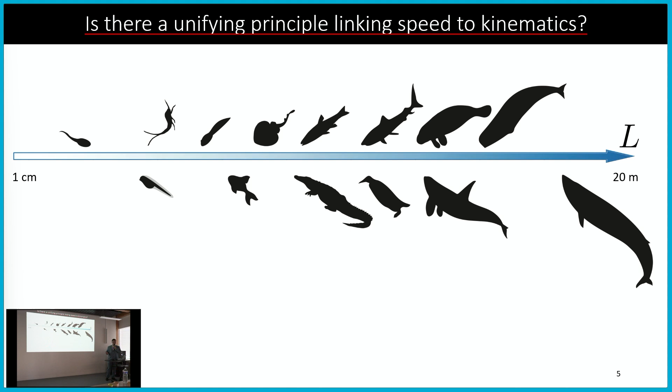So now, first of all, I'm going to introduce the context, pose you the open scientific questions and tell you the motivations of my PhD. And then I will move on with the rest of the work. So the scientific question that has been triggering researchers for many decades is principles that could unify the link between the swimming speed of aquatic animals and their kinematic parameters. For this, researchers in 2014 have taken many species of aquatic animals of several lengths, starting with several centimeters and ending with several tens of meters, and they wanted to find the link between this swimming speed, velocity, and the length of the aquatic animal, the amplitude of fin undulation, and the frequency of fin undulation.

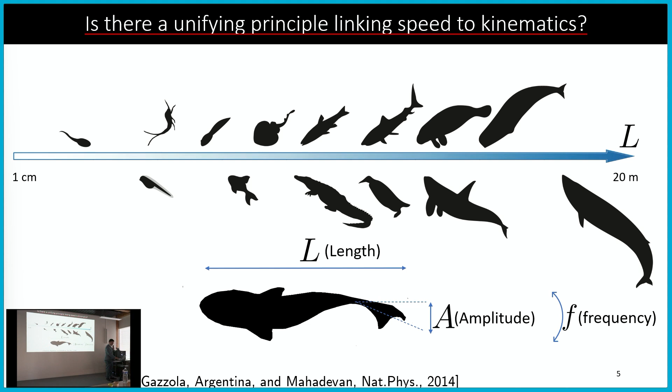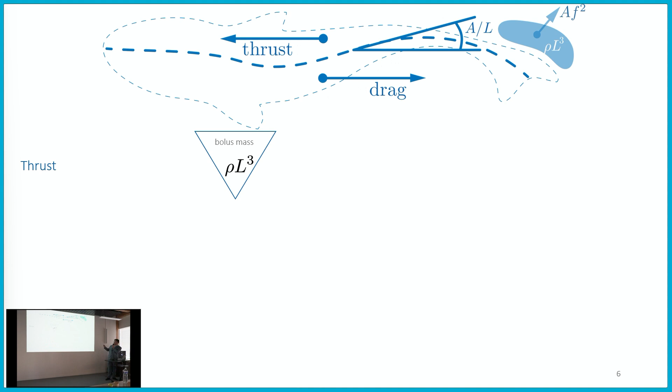So now I'm going to demonstrate you a simple derivation of the force balance when fish is moving in water. When fish is moving in water, it propels with its tail the bolus of water with a mass proportional to the density of fluid and to the length to the third power. And this mass moves with acceleration that is proportional to the amplitude of fin undulation and frequency to the second power. And this force exerted by the fin on the bolus we need to project on the axis of movement of the fish, which is for small angle defined by amplitude divided by length. So the resulting thrust force is proportional to this quantity here.

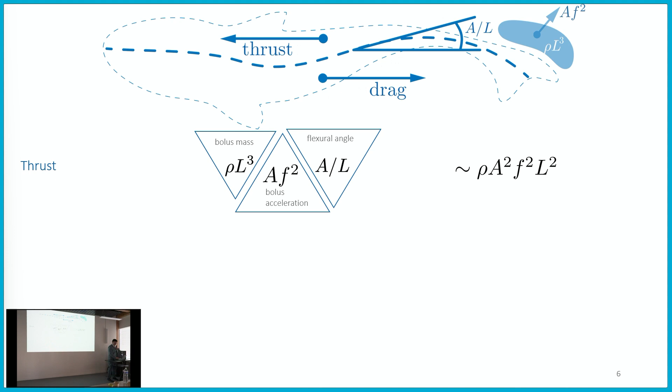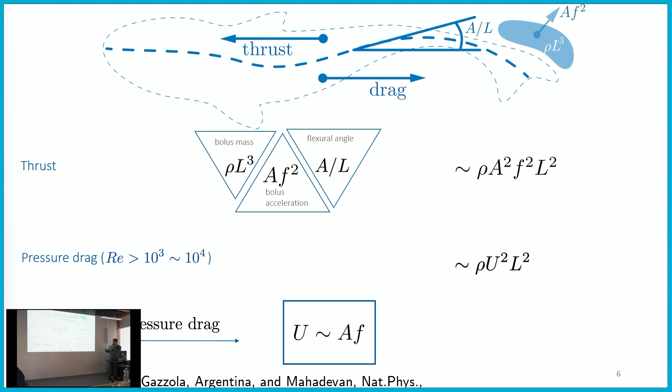On the other hand, when fish is moving in water, it experiences a drag, and particularly a pressure drag for high Reynolds numbers, which is the case of the majority of the fish, and this drag is proportional to the density of fluid, to the speed to the second power and to the length to the second power. So when fish is in constant movement, the thrust force is equilibrated by the drag force. And we obtain that the speed of movement of aquatic animal is proportional to the amplitude of fin undulation and frequency of fin undulation, while the Strouhal number is constant for most of the fish and equal to 0.3.

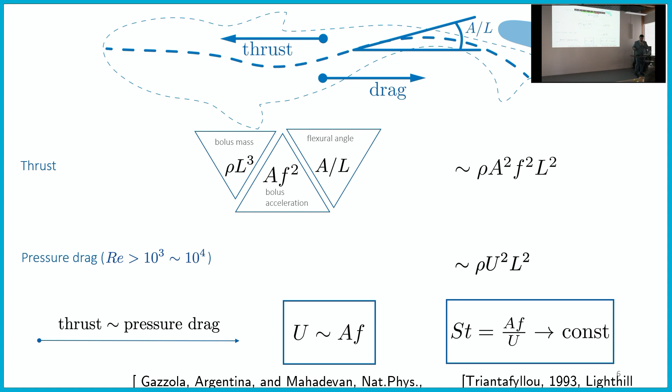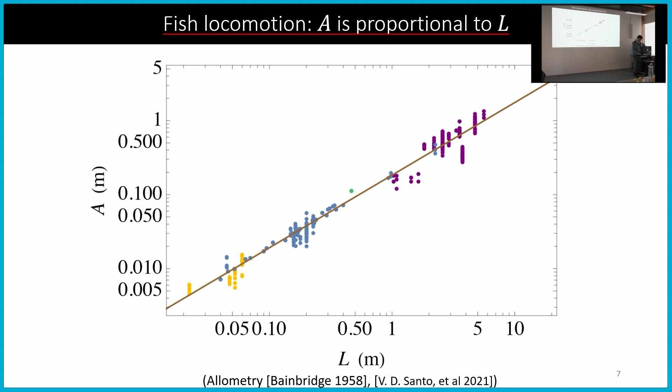On the frequency side, the question of how fish choose their undulation frequency is not that clear, because the frequency can change along the swimming gait, and fish can choose different swimming gaits depending on different circumstances potentially.

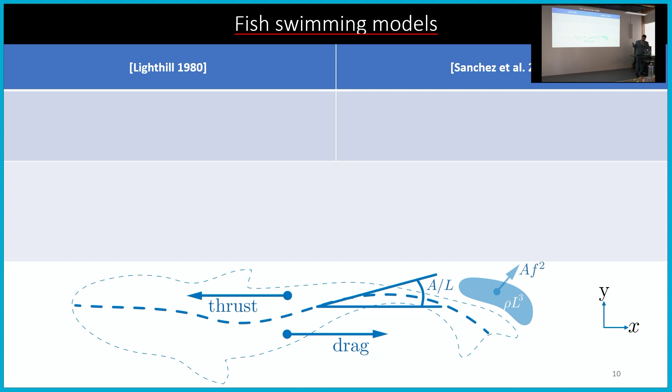There have been many models developed for determining the mean thrust force for fish. We'll focus on two of them, and one is from a researcher of our group. So in 1980, Lighthill studied oscillating airfoils, and he found that the mean thrust force is proportional to the added mass, and this expression is quite similar to what Sanchez found in 2021, that mean thrust force is proportional to the added mass times the second derivative of the angle of undulation.

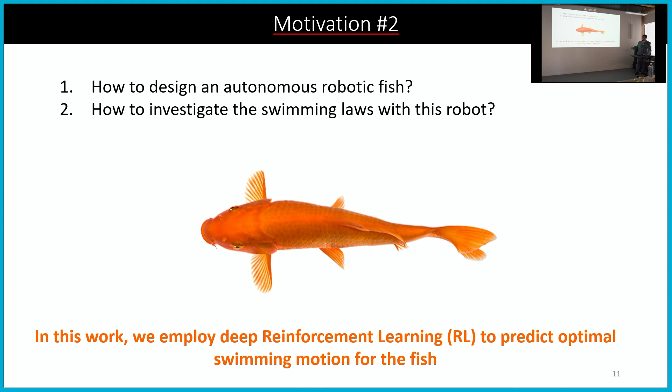Now, another motivation for this work is to construct a mimetic robotic fish and then to study swimming laws with it. In this work, we employ particularly deep reinforcement learning to predict optimal swimming motion for the fish. So before proceeding with reinforcement learning, I would like to introduce briefly machine learning and its subtypes. Machine learning is the study of patterns in data in order to generalize on unseen data.

On the other hand, we have the dimensionality reduction technique. The popular example is principal component analysis. There is also a popular example of the autoencoder network. The network is given an input, an image. It maps this image into latent space, and from latent space it decodes the original image.

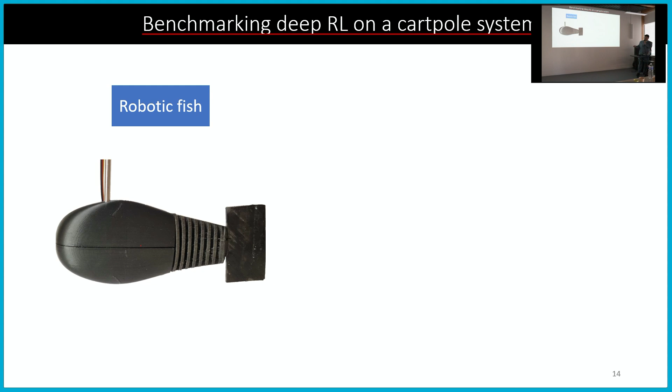So after this agent-environment interaction loop, little by little, the agent learns how to maximize its score. And I would like to emphasize that this paradigm of reinforcement learning doesn't need a physical model to operate. So our focus was the application of reinforcement learning algorithms on robotic fish, but beforehand, I would like to illustrate the application on a cartpole system, which has been a benchmark in control theory for over 50 years.

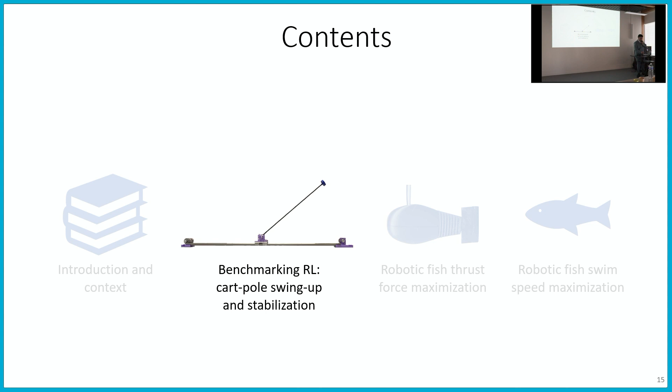So there are two phases of this task, swing up and stabilization, that I'm going to describe in the next slides. So what is the cartpole system? Many of you may already know. It's a pole attached to the middle of the cart. And the objective is to move the cart along the line to swing up the pole and stabilize it at an unstable equilibrium.

There are two variables that change over time in this system: the angular position of the pendulum and the cart position. And we have a control defined by the consigned cart velocity. This dynamical system is governed by two differential equations, one governing theta evolution.

So we have a viscous friction here, we have a gravitational response, we have a component influenced by the cart movement, and on the other hand, we have a component for X evolution. We have consign, we have a viscous friction, we have a dry friction, and an asymmetry component. So the fact that reinforcement learning is able to learn to swing up and stabilize without the knowledge of the dynamical system or these parameters is truly remarkable.

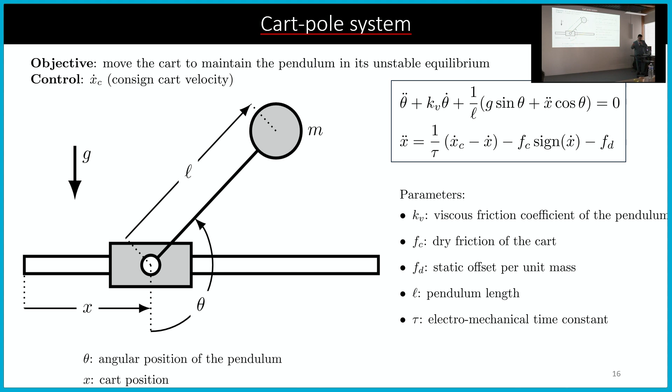Now, I would like to demonstrate briefly the setup. It consists of a Raspberry Pi that sends commands to a DC power drive that actuates the DC motor with pulse width modulation, which moves the cart with a tooth belt. And there are two rotary encoders recording the position of the cart in X and the angular position of the pendulum.

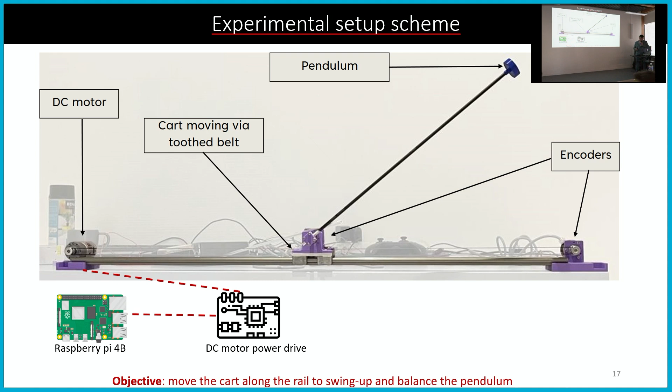To demonstrate the benchmark, we applied model-based control, which consisted of an energy-based swing-up method relying on Lyapunov theory, which only works for swing-up. And then at small angles near the unstable equilibrium, the system can be linearized, and we could apply a linear quadratic regulator to balance the pendulum. The particularity of this approach is that while it works well, it requires knowledge of the physical model and fitting parameters.

On the other hand, we have a reinforcement learning approach to swing up the pendulum. At the beginning, it doesn't know what to do, and after several hours of interaction, the neural network learns how to swing up the pendulum and stabilize it at the unstable equilibrium. Here in this work, we used this algorithm, DQN.

Coming back to the agent-environment interaction loop, we have the following. We have an agent defined by a neural network that outputs discrete actions, in this particular case to stop the cart or to move right or left, the consigned velocity. And we have an environment that changes over time that outputs the state defined by the angular position of the pendulum, the cart position, and their time derivatives.

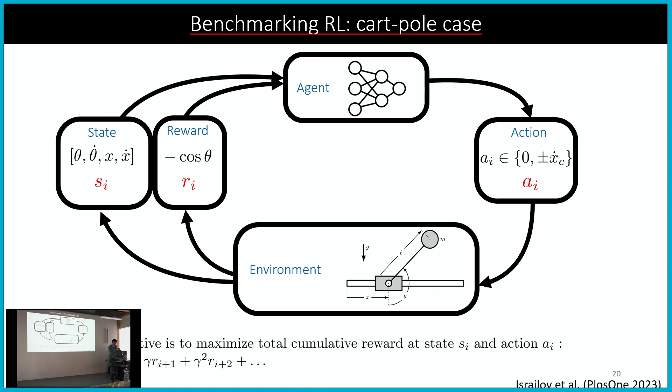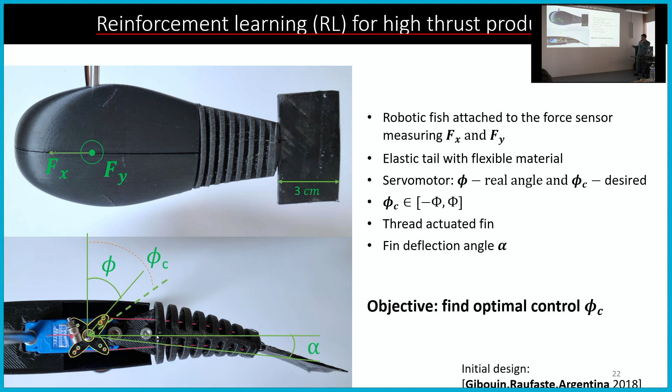This robotic system features a servo motor characterized by a real angle phi and a consigned angular position phi c. The servo motor head is attached to the elastic fin via two threads. And the elastic fin is characterized by a deflection angle defined like this. The objective in this task is to find an optimal control of phi c over time to optimize a certain quantity, particularly here, the mean thrust force.

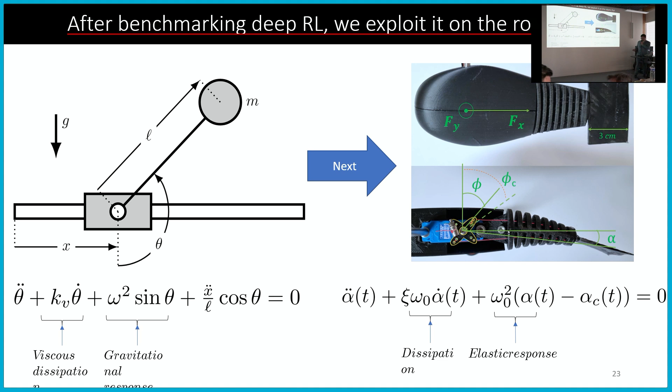Two modalities of learning were employed in this work. We had image-based learning based on the camera mounted at the top of the fin. We take 4 consecutive images because not only do we need to know the details of the undulation of the fin, but also first and second derivatives. This stack of images at every time step is passed to the feature extractor convolutional neural network that outputs the latent space vector, which is passed to the actor-critic algorithm.

I will not go into details, but the actor determines which action should be taken, and the critic network evaluates the action taken by the actor. Another mode of learning is purely low-dimensionality sensor-based. We have a force in Y direction, its derivative, and the consigned angular position of the servo motor.

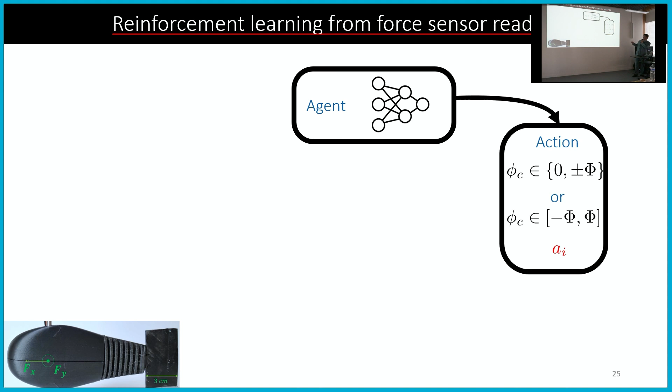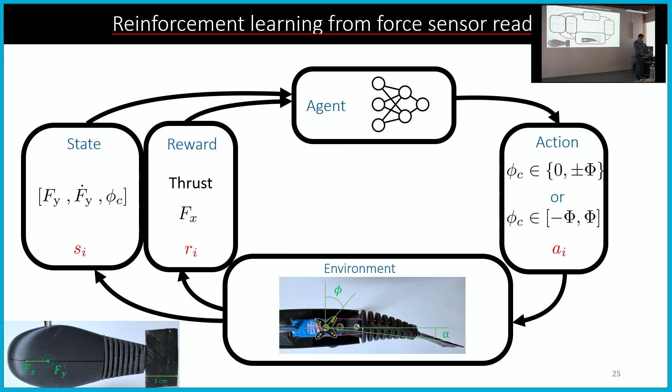Coming back to the agent-environment interaction loop, we have an agent, here a maximum a posteriori policy optimization agent, outputting either discrete or continuous actions and actuating the environment that changes over time, which outputs a low-dimensional state, or in the case of images, the stack of 4 images at every time step. It is passed to the agent.

Now I present you the visual results of reinforcement learning from images. Reinforcement learning from purely low-dimensional sensor state values gives similar results.

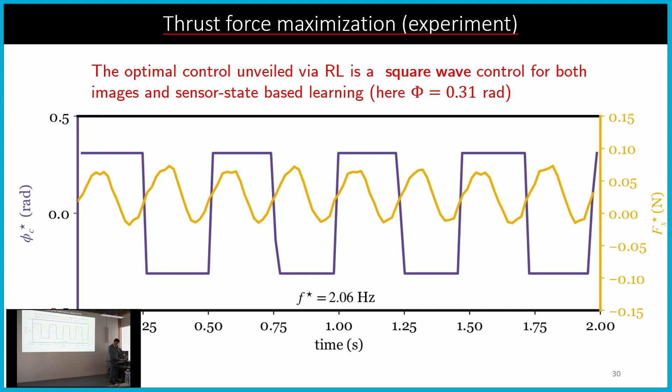Now we suppose that there are 3 potential candidate control policies that could optimize the mean thrust force: square wave, sinusoidal, or triangular wave functions. These 3 control policies were applied on a robotic fish with different frequencies for the same time interval, and we plotted the mean thrust force for all of them.

We can see two remarkable things here. First, the square wave control function outperforms both sinusoidal and triangular wave functions, and an optimal frequency of control exists that can be rationalized due to the elasticity of the fin.

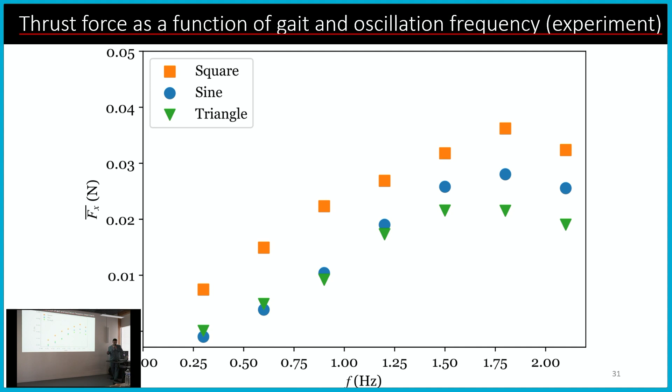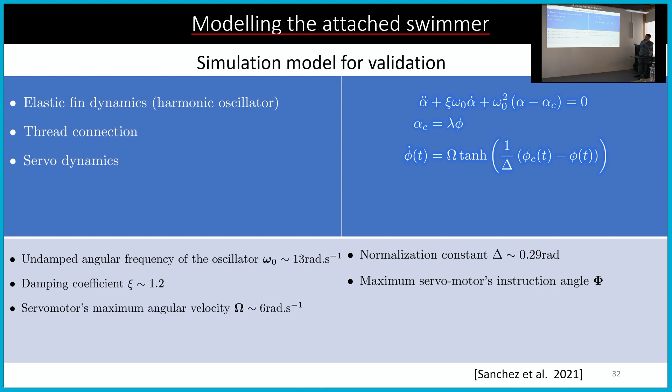Now, to validate the experimental findings we found before, we want to make a simulation that mimics the real robotic fish. An elastic fin is defined by a second-order harmonic oscillator. We have the string connection defined by this linear equation. We have the servo dynamics defined by a hyperbolic tangent function for the speed of the servo motor, and we calculate the mean thrust force as a time integral with this expression.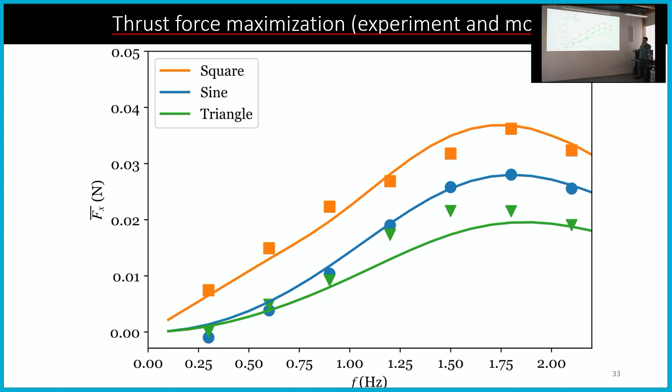When we combine different modalities in experiments and simulation learning with reinforcement learning, plotted here in squares, we observe that they all nicely overlap, and the analytical model as well, only using the dynamical equation without reinforcement learning, we find that they all agree on the same tendency.

This suggests that with increasing instruction angle, we have an increasing mean thrust force, and with the optimal frequency of fin undulation, we also observe the same tendency that it decreases with an increasing instruction angle.

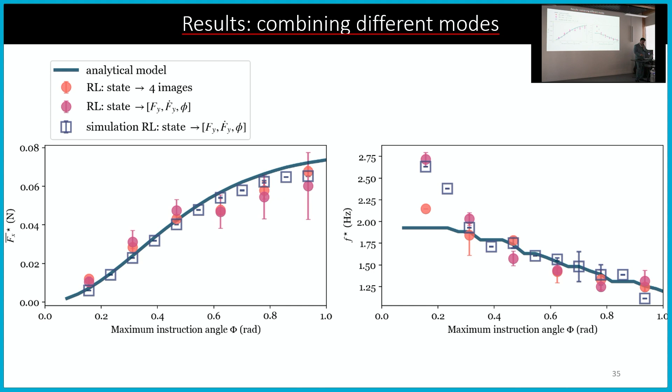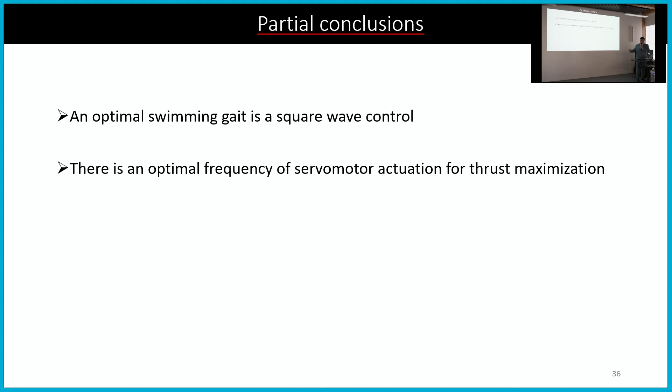So now, to conclude partially, I would like to tell you that we were able to find an optimal swimming gait, which is a square wave control. We found that an optimal frequency of actuation exists that can be rationalized due to elasticity of the fin, and we also found that both image-based and sensor-based modalities for learning give the same results, suggesting the robustness of learning.

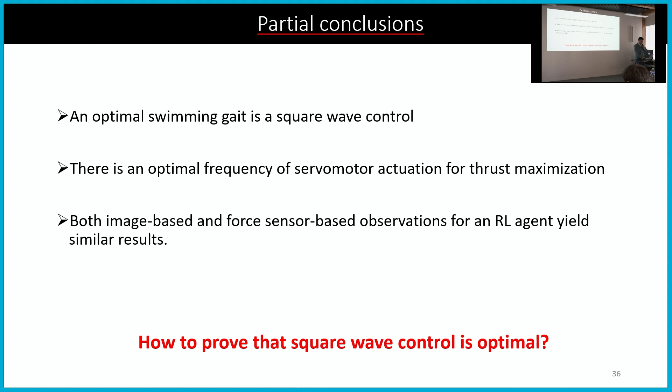And now we want to prove it from a theoretical point of view of optimal control theory, namely Pontryagin's maximum principle, which states that bang-bang control—the common name for a square wave control seen before—is optimal for linear systems. Our objective here is to prove the optimality of bang-bang control for the particular task of thrust maximization under fish dynamics.

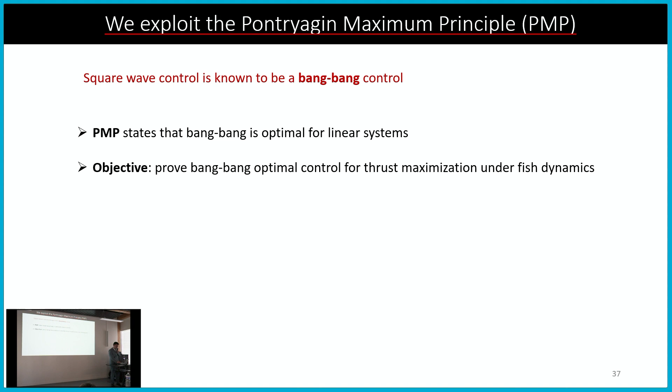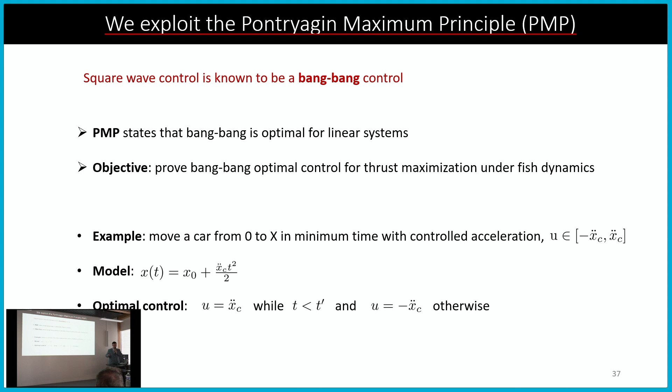Before proceeding with this example, I'd like to give a simple illustration to comprehend the principle. You may be familiar with this kind of example: we have a car parked at 0 that we want to move to position X in minimum time possible, with controlled acceleration bounded by certain quantities. The model of this system is well known, and the optimal control can be deduced intuitively: we need to accelerate at maximum until half of the trajectory, then decelerate for the rest of the trajectory to achieve minimum travel time from 0 to X.

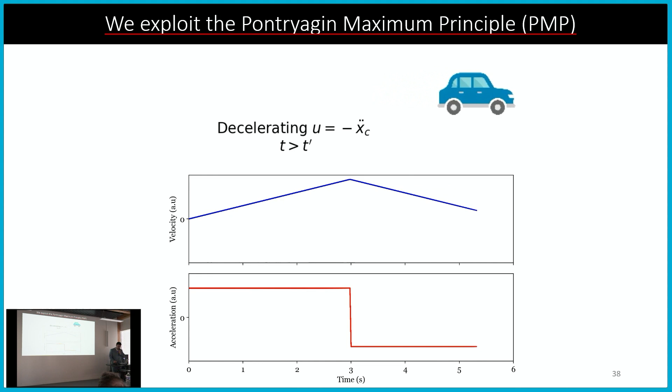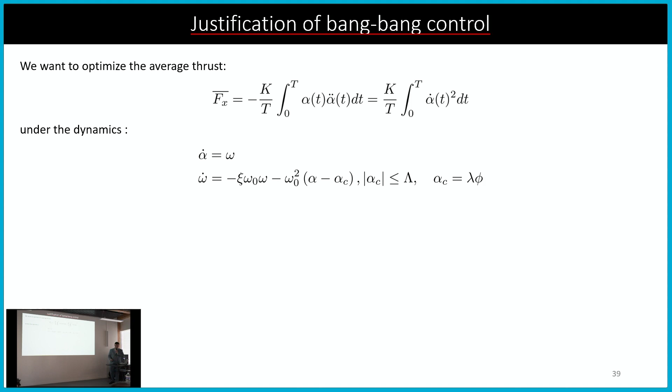So now our objective is to find an optimal average thrust, defined by this equation, under fish dynamics. Here we suppose the servo motor is fast, meaning it perfectly follows the commanded angular position, and we can neglect the servo motor dynamics. So here you see the dynamics only for fin undulation.

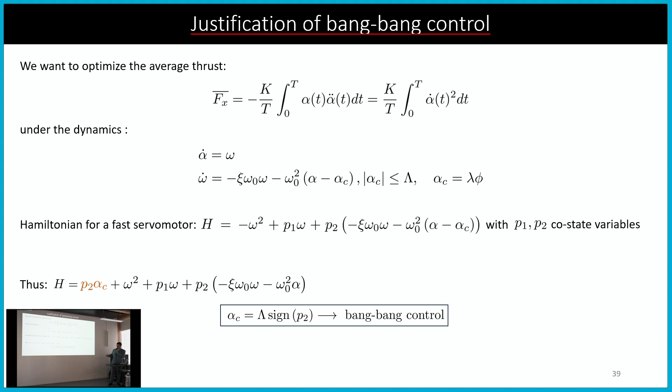The Hamiltonian for this system is described by this equation: this component is for the thrust force, and this component is for fin dynamics with P1 and P2 co-state variables. When we reformulate this equation, we obtain a Hamiltonian expressed like this, and it suggests that we need to choose alpha C in relation with the sign of P2 in order to extremize the Hamiltonian. This suggests that the optimal control is bang-bang control, in order to extremize the Hamiltonian or optimize the thrust force.

Now, moving forward, I'd like to present the task of robotic fish swim speed maximization, free in water. Fish locomotion remains a complex subject because of the intersection of biology and fluid dynamics. Fish have a lateral line system, which is not very well understood, that enables them to perceive the environment.

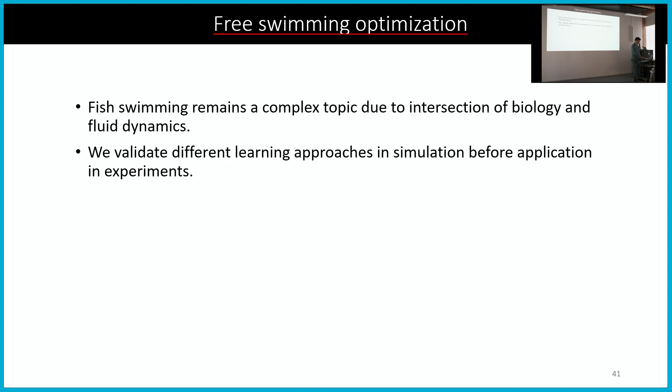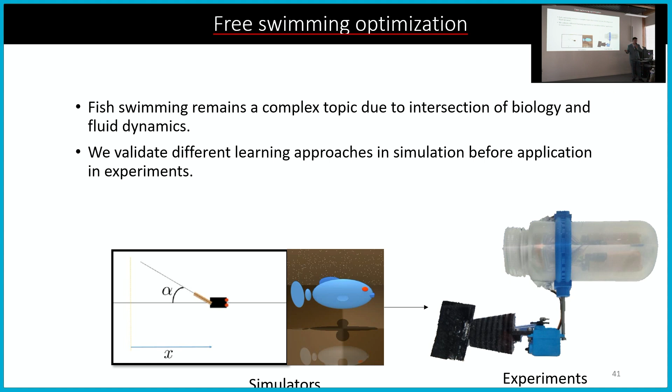The simulation based on custom dynamics is quite idealistic. We also suppose the servo motor is fast and we can neglect servo motor dynamics, but I performed several simulations incorporating it into the system, and it gives similar tendencies. For simplicity and presentational reasons, I don't include it here.

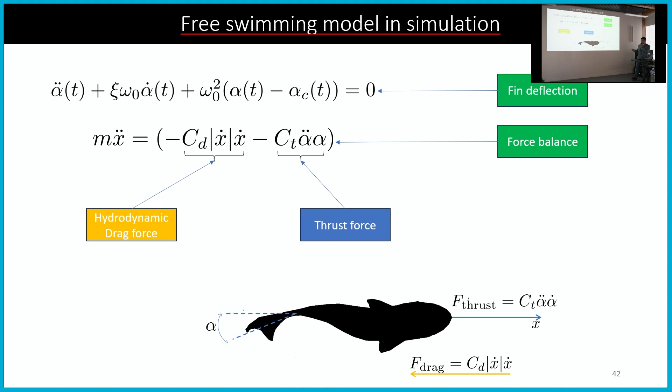We have a second order harmonic oscillator for fin deflection, given by this equation according to Newton's second law: mass times acceleration equals the total forces exerted on the fish, here the thrust force and the hydrodynamic drag force. We approximate this fish swimming with a simplistic simulator, defined by the X displacement and alpha deflection angle of the fin.

Now the agent is a neural network that actuates with continuous actions in a dynamical system defined by these equations. The state can be either a low-dimensional ground truth state—here X and alpha deflection angle and their time derivatives—or, because of partial observability of the image, a stack of 4 images at every time step as input to the agent. The reward is always defined as the mean speed along the X direction.

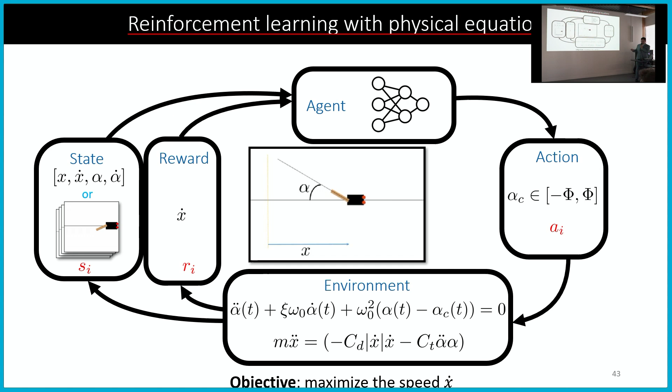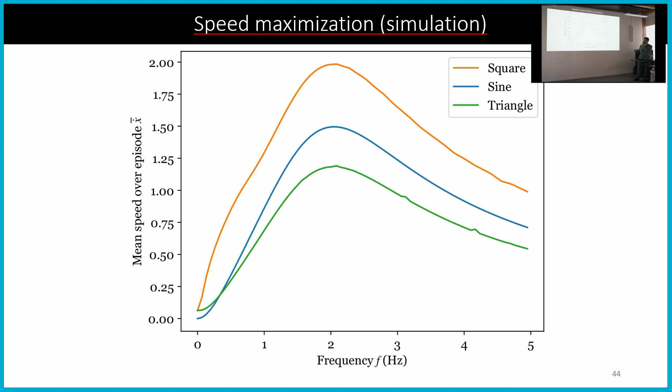As before, we suppose there are 3 potential control policies that optimize mean speed over an episode: square wave, sinusoidal, and triangular wave. We found similar tendencies suggesting the superiority of bang, or square wave, control, and an optimal frequency of fin forcing.

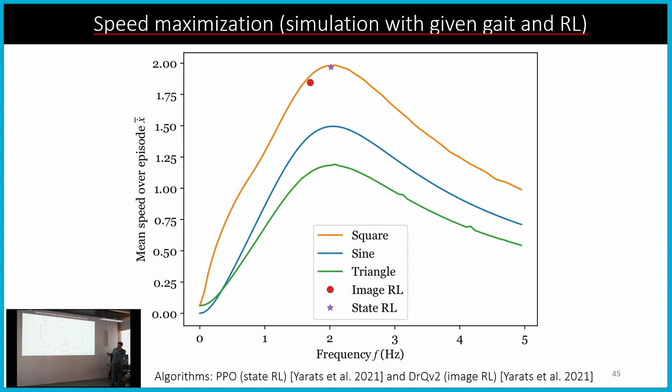Now, applying reinforcement learning based on simulated images or a low-dimensional state of 4 dimensions, we found that RL was able to understand and find the optimal policy, particularly for state observation. Now I present a simple result of inference, where the task was to maximize the speed.

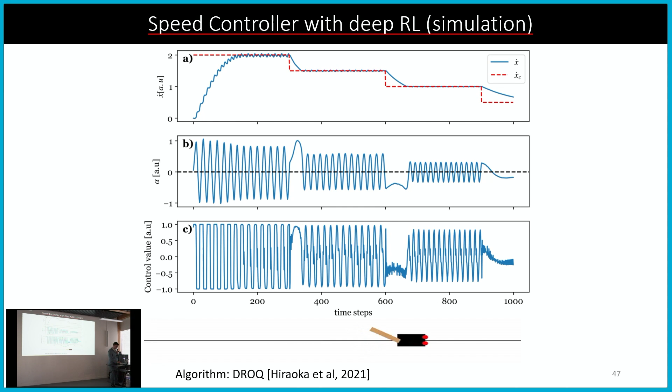Moving forward, another simulator applied in my work was based on the MuJoCo engine, which is very popular in the reinforcement learning community. Here you see an example of the environment. The fish is constrained in one direction, and the task is to move as fast as possible in this direction while actuating this small active tail.

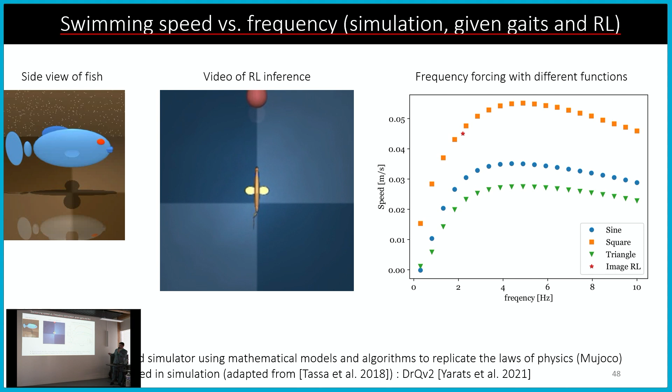As before, we suppose there are three control policies that could potentially optimize the swimming speed: square wave, sinusoidal, and triangular. Again, we found similar tendencies, suggesting robustness of the previously found results. We also found that RL using raw images was able to find bang control from the images alone.

Moving forward, there is an experimental setup. We proceeded with a quite simplistic setup. We wanted to reuse the previous conception with an elastic tail and servo motor. We also had the problem of whether the fish was fully immersed in the third dimension, so putting a floater on the surface of the water eliminated the complexity of the third dimension. We could also communicate with the Raspberry Pi via Wi-Fi protocol, which is quite convenient.

You can also see we had different sensors, and the robotic system was swimming against the water flow. The system accomplished a totally wireless setup, without any dry friction that could potentially pose a problem when learning with an RL algorithm.

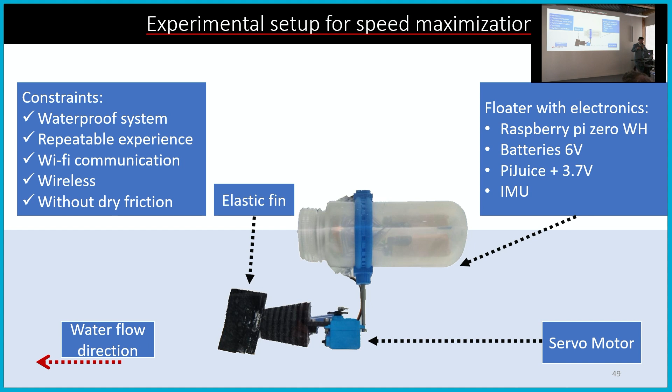This is an image from the top of the robotic system. This is the water tunnel, and the water flow is in the opposite direction of the fish's swimming. The fish starts around this so-called restart triangle. It moves forward until a certain time has elapsed, then moves back with the water flow, and the episode reiterates. After some time of interaction, little by little, the robotic fish learns how to swim appropriately in order to maximize its swimming speed.

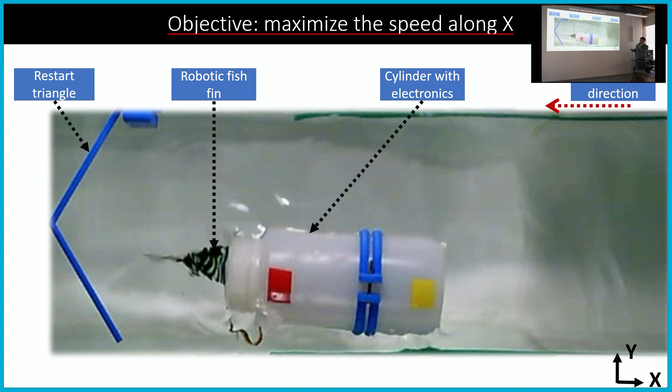Now the agent-environment interaction looks like the following. We have, like before, a neural network as an agent, with discrete or continuous actions. We have the environment defined by the robotic fish in a water tunnel, and we also put two different markers in order to extract useful features from an image, because learning from images can take a lot of time in experiments, so it's better to pre-process some information.

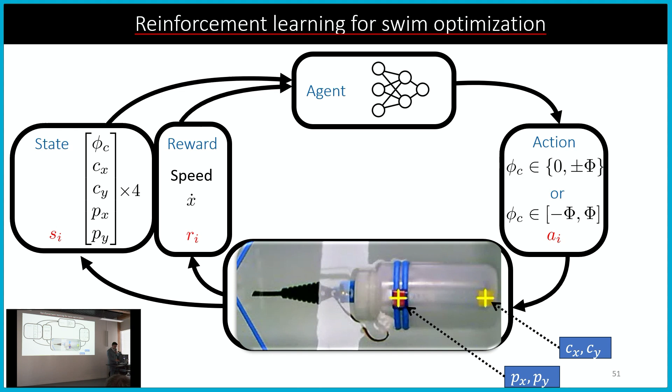The state here is defined as a consign angular position for the servo motor, and the X and Y position of the first and second marker, repeated with previous time steps, as was the case for images. This permits us not only to find the position and orientation of the robotic fish, but also first and second derivatives, in order for an agent to control the system appropriately. The reward is defined as the swimming speed in the X direction.

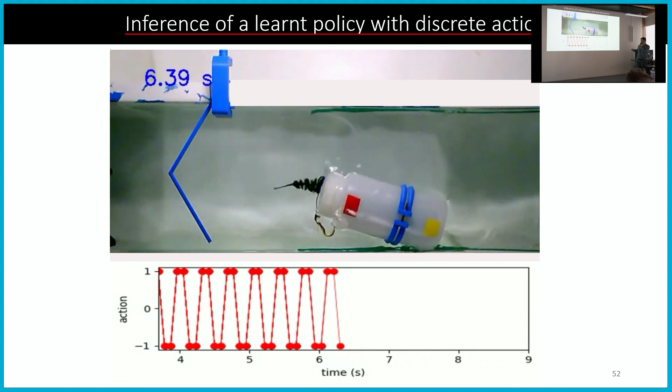Here is a simple example of a PPO agent learning a harmonic policy, in inference, to move with a certain frequency.

And it can be rationalized by the fact that when this robotic fish is in movement, it creates a wave that interacts with the movement of this fish and changes potentially the dynamics of movement.

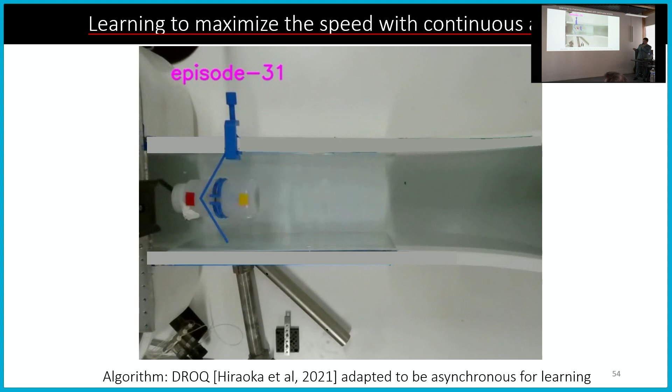Here I present you also learning with continuous actions. So the algorithm used here was able to little by little learn to make this fish swim in a straight line, and the distance is increased. So you can see at the beginning it bumps into walls. Little by little it will be able to move more and more forward, and the distance also will increase for the same time episode.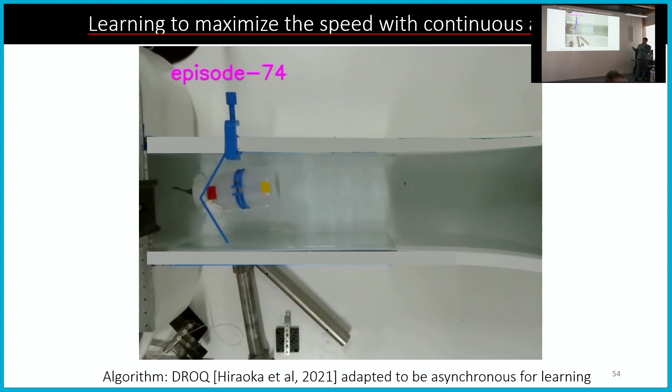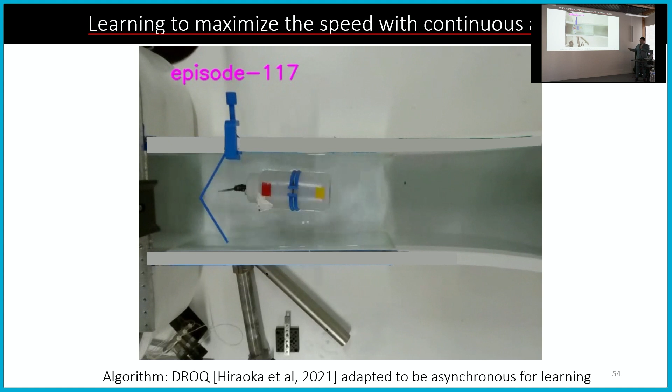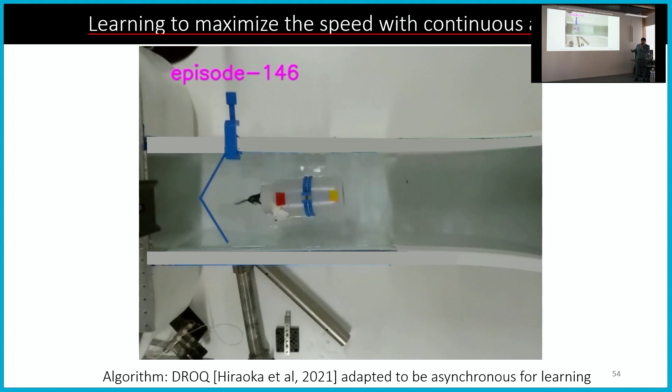The algorithm used was DROQ, and it was adapted to learn here in a particular case asynchronously, meaning that the agent was always learning off-policy from a replay buffer while interacting with an environment. So it optimizes the time of learning, and then next steps would be also to make the controller learn a particular speed, which needs even more interaction time.

So I will move forward with the conclusion. We had these robotic systems, and we applied model-free deep RL for mean thrust force maximization. We found that an optimal control is a square wave function or bang-bang control. We found that both simulation and experimental data nicely overlap, suggesting the robustness of learning and validity of simulation.

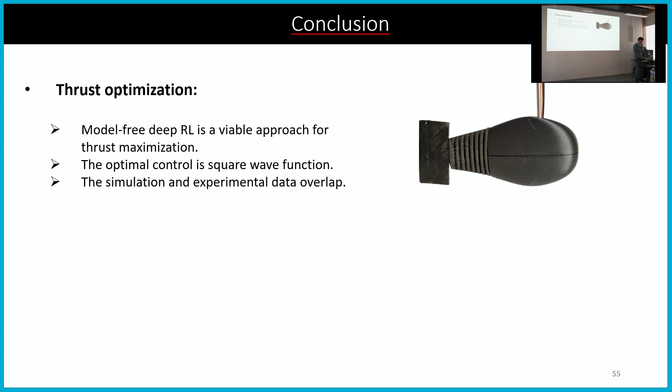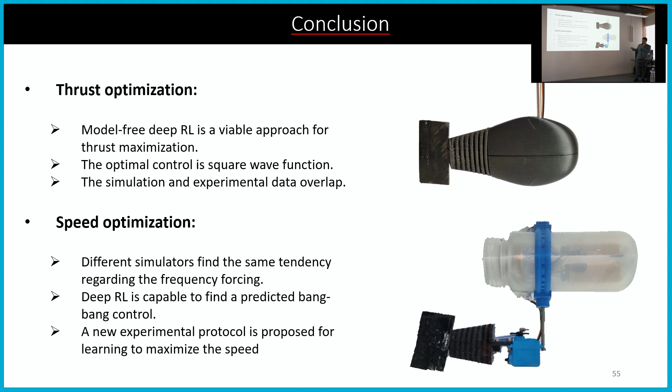We also performed speed optimization with this system based on the pre-extracted features of two markers on the top of the bottle. We were able to find that for different simulators, we find the same tendency, suggesting the superiority of square wave forcing, and we found that PPO was able to find this bang-bang control.

Now I would proceed with scientific perspectives. So we applied the speed controller, and the next step would be to proceed with an experiment. Also, a visual servoing task was explained in the thesis. That could potentially be applied in experiments, and we have experimented with different conceptions of this initial fish robot.

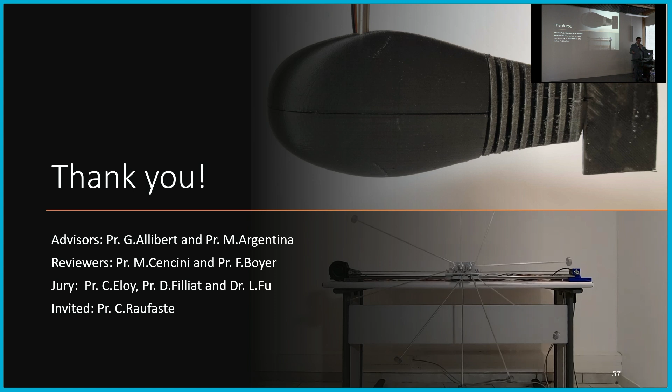So I will tell you about what will be in the report. It will not be the exact words of the report because we didn't draft a final version yet. It's sort of a draft. So Sardor Israilov presented his work on using deep reinforcement learning for a swimming robot. This interdisciplinary work combines robotics, physics, and control theory. During the defense, that was very clear. He showed a large amount of work and very interesting results on the control of a swimming robot. The presentation was accessible to a very diverse audience and complementary to the manuscript.

During the answers to the questions, he showed real maturity, very good knowledge and expertise in different fields, and he showed that he could adapt his vocabulary to a large spectrum of fields. For all these reasons, we'll give him the grade de docteur de l'Université Côte d'Azur en automatique, traitement du signal et des images. Bravo. Bravo.